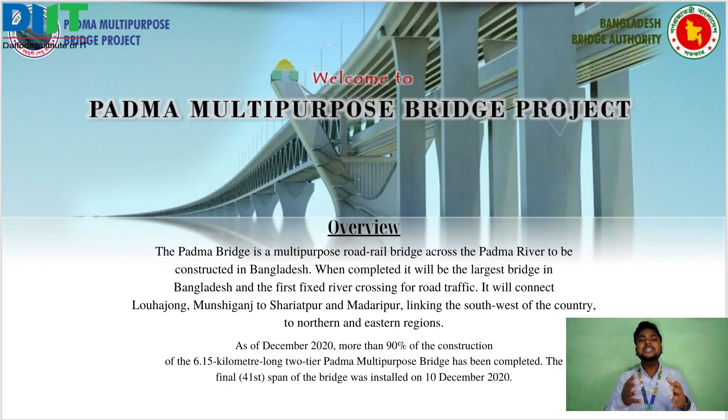Now I will talk about the general information of the Padma multipurpose bridge. The first point is land acquisition, which is almost about 1,471 hectares. The second point is the bridge in brief.

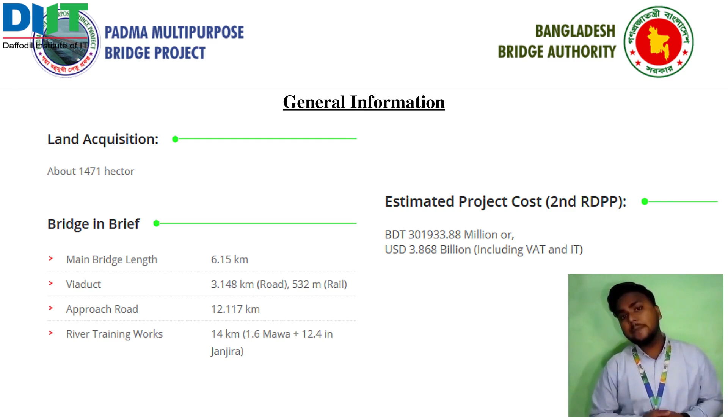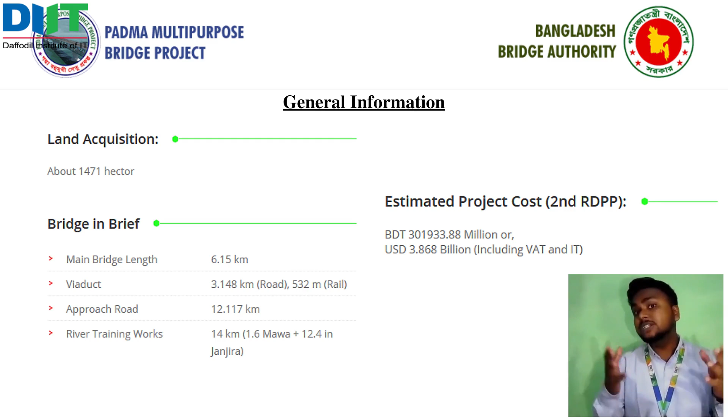First, main bridge length is 6.15 kilometer. Viaduct is 3.148 kilometer for road and 532 meter for rail. Approach road is 12.117 kilometer. River training works total 14 kilometer, which is 1.6 kilometer for Mawa and 12.4 kilometer for the Janjira side. The third point is estimated project cost, which according to the revised development project proposal is 301.93 billion Bangladeshi taka, or 3.868 billion USD, including VAT and income tax.

Let's move to the next slide. This is a visual presentation of Padma Bridge. Padma Bridge is the name of a dream for our Bangladesh. The bridge will be approximately 6.15 kilometer long and 18.10 meter wide. It will be a double deck composite steel trussed structure and will use 41 spans.

The main spans will be 150 meter long. The upper deck will contain a 4-lane highway, while the lower deck will house a rail line, gas transmission pipeline, optic fiber cable, and power transmission line. The speed of the train will be 160 kilometers per hour. The total lifespan of the bridge will be 100 years. When the bridge is active, it will take less than 10 minutes to cross by car.

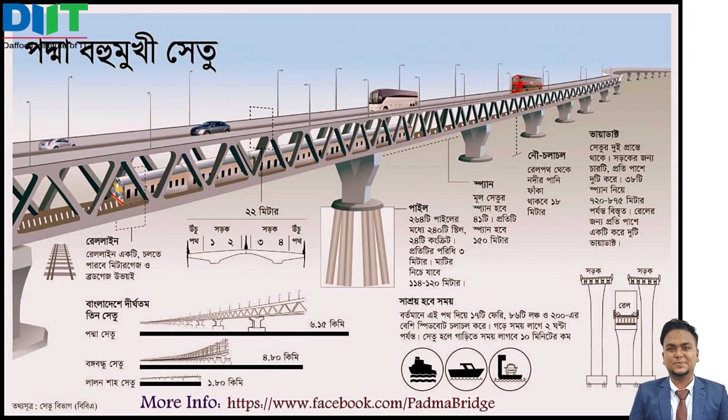Now we will watch a 3D animation video of the Padma Bridge.

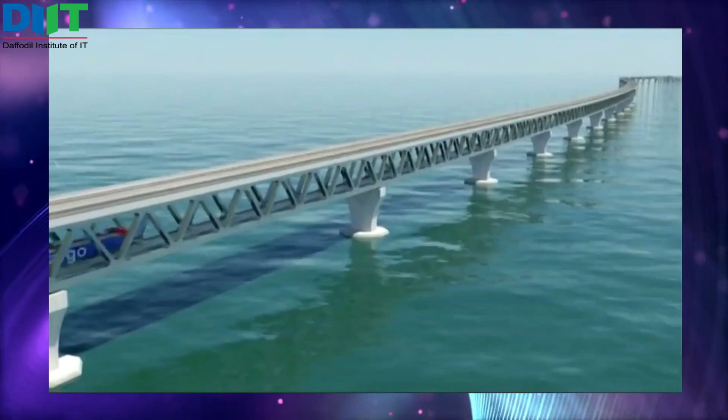Now I will talk about the type of project. The Padma Bridge is a multi-purpose road-rail bridge project across the Padma River, a constructional and communicational type project. It will connect 21 districts in the south. Moreover, direct communication will be established between Mongla Port and Benapole land port through the capital and the port city of Chattogram. According to Railways Minister Nurul Islam Sujon, the railway line from Dhaka to Bhanga in Faridpur will be launched with the opening of the Padma Bridge.

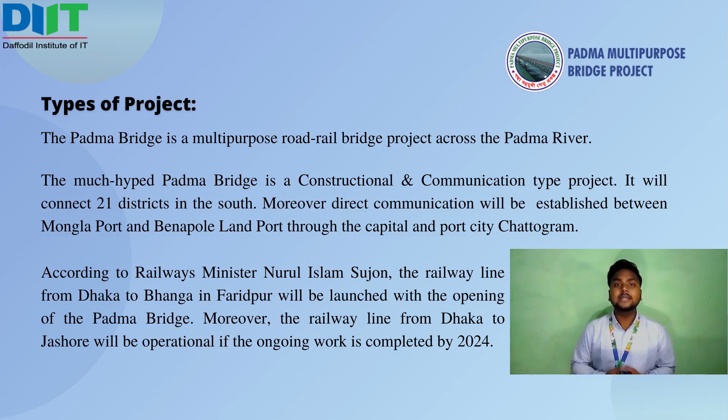Moreover, the railway line from Dhaka to Jashore will be operational if the ongoing work is completed by 2024. The timeline of this project: construction started 7th December 2014, with the project expected to end in 2022. A country's economy mainly develops through its communication system. When the Padma Bridge is completed, the communication system between the southwest district and the whole country will be developed as well.

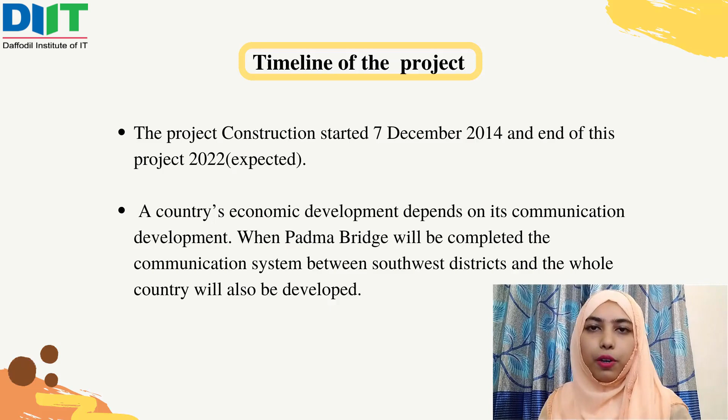Which companies are involved in this project? China proposed building the bridge on a build-own-transfer, or BOT, basis by investing $2 billion, or 70% of the project cost. Four companies, China Major Bridge Engineering Company, Daelim-L&T JV and Samsung C&T Corporation, purchased the tender papers, but only the China company proposed their financial proposal, on 24 April 2014.

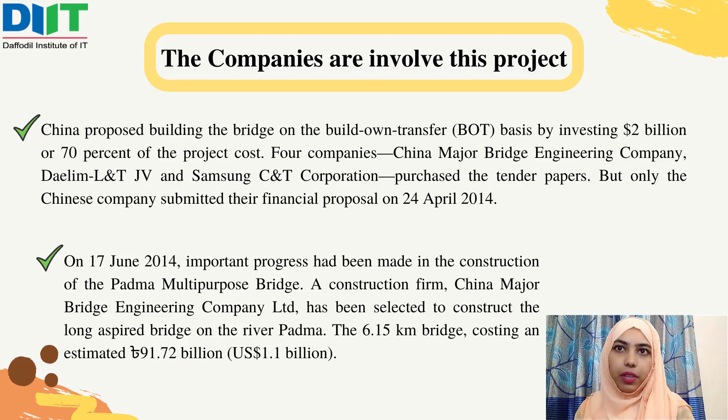On 17 June 2014, important progress had been made in the construction of the Padma multi-purpose bridge. A construction firm, China Major Bridge Engineering Company Limited, was selected to construct the long aspired bridge on the river Padma. The 6.15-kilometer bridge cost an estimated Taka 91.72 billion, or USD 1.1 billion.

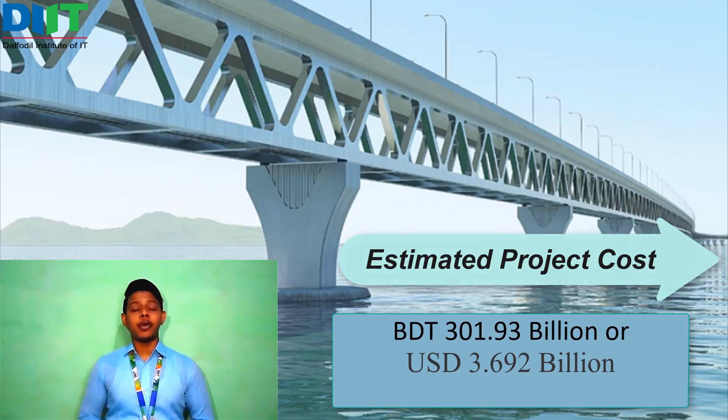The estimated project cost as per final decision and design is 287.93 billion Bangladeshi Taka. After that, the government of Bangladesh purchased some land and added additional cost of 14 billion Bangladeshi Taka. That's why the entire cost of the Padma multi-purpose bridge is 301.93 billion Bangladeshi Taka, that means 30,193.38 crore Bangladeshi Taka, which is 3.692 billion US dollars, including VAT and income tax.

Let's talk about the Padma multi-purpose bridge project cost summary, the last revised development project proposal. There are 8 types of work components. The first component is main bridge cost, where the DPP cost is 121.33 billion Bangladeshi Taka, which is 40% of total cost.

Then approach road, 12 kilometers with toll plaza and service area 2, where DPP cost is 19.08 billion Bangladeshi Taka, which is 6% of total cost. Then river training works, 13.8 kilometers, where DPP cost is 94 billion Bangladeshi Taka, which is 31% of total cost.

Then resettlement, where DPP cost is 15.15 billion Bangladeshi Taka, which is 5% of total cost. Then land acquisition, where DPP cost is 26.99 billion Bangladeshi Taka, which is 9% of total cost. Then environment, where DPP cost is 1.29 billion Bangladeshi Taka, which is 1% of total cost. Then consultancy, where DPP cost is 6.78 billion Bangladeshi Taka, which is 2% of total cost.

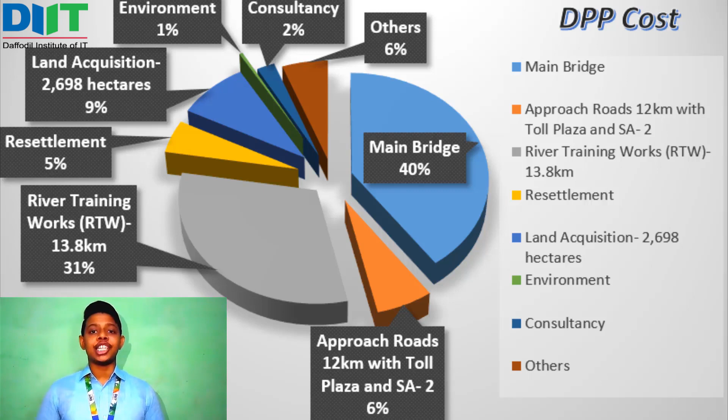Then other cost, where salary, VAT, transport cost, income tax, etc., the DPP cost is 17.31 billion Bangladeshi Taka, which is 6% of total cost.

Let's talk about the increased cost of this project. The government of Bangladesh faced lots of problems to make this project successful. The Padma Multipurpose Bridge was first approved by the Executive Committee of the National Economic Council (ECNEC) in 2007 with an estimated cost of BDT 101.61 billion. After that, the length of the bridge was increased due to a change in design, for which the estimated cost hiked to BDT 205.07 billion, which was approved by ECNEC in 2011.

The second revision of the Multipurpose Bridge project was approved by the Executive Committee of the National Economic Council (ECNEC) on 5th January 2016 with an estimated cost of 287.93 billion Bangladeshi Taka, to be implemented by December 2018. After the second approval in December 2018, the estimated cost of the much-hyped Padma Multipurpose Bridge project is likely to see a rise for the third time, by around 14 billion Bangladeshi Taka. The new rise will take the overall cost up to 301.93 billion Bangladeshi Taka, as acquisition of additional land is required for the project.

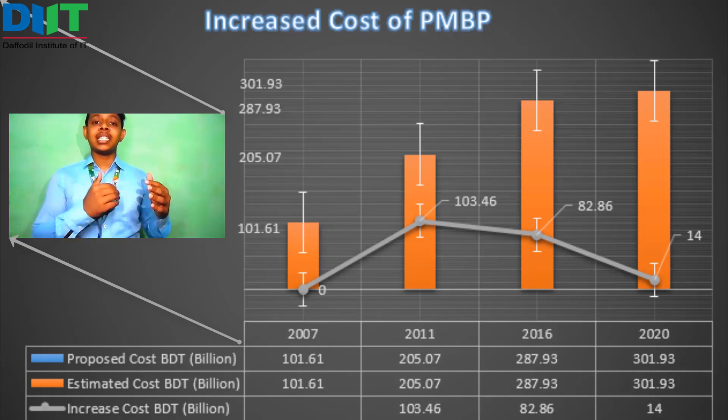The increased cost from 2007 to 2011 is 103.46 billion Bangladeshi Taka. On the other hand, the 2011 estimated and proposed cost is 205.07 billion Bangladeshi Taka, and the 2016 proposed and estimated cost is 287.93 billion Bangladeshi Taka, where the increased cost is 82.86 billion Bangladeshi Taka.

And last, the 2016 to 2020 increased cost: the 2016 estimated and proposed cost is 287.93 billion Bangladeshi Taka, and in 2020, the estimated and proposed cost is 301.93 billion Bangladeshi Taka. The increased cost is 14 billion Bangladeshi Taka, which is for purchasing land.

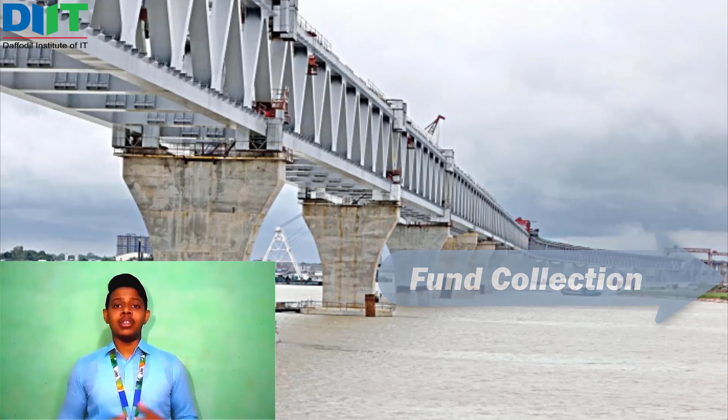Let's talk about the fund collection agency, where and how the fund has been collected. Financing plan and loan signing have been finalized with development partners like World Bank, Asian Development Bank, Japan International Cooperation Agency, and Islamic Development Bank.

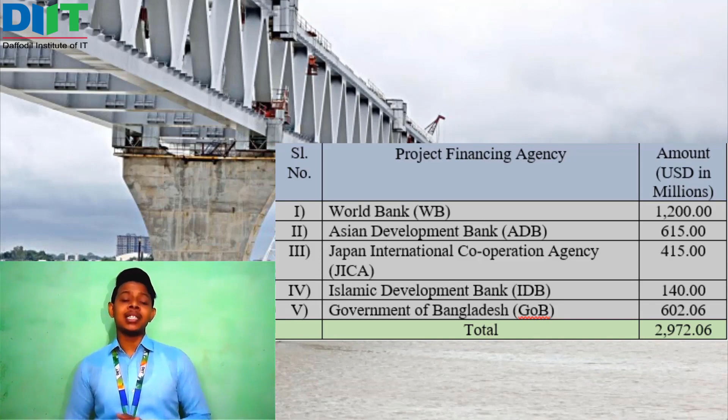The project financing agencies who gave us loans to make this project successful: first of all, World Bank gave us 1,200 million US dollars. Then Asian Development Bank gave us 615 million US dollars. Then Japan International Cooperation Agency gave us 415 million US dollars, and Islamic Development Bank gave us 140 million US dollars. The implementation of the Padma Multipurpose Bridge project faced a setback in the earlier stage, on 29 June 2012.

The World Bank had cancelled its 1.2 billion IDA credit for the project, claiming that it had credible evidence of a corruption conspiracy among high level Bangladeshi government officials, SNC Lavalin executives, and private individuals.

After that, the government took it as a challenge and decided not to take loans from funding agencies. On 9 July 2012, they decided to complete the project with its own funds. The Honorable Prime Minister said the government had earmarked Taka 1500 crore for infrastructure development and 3000 crore Taka in the public and private partnership fund. Besides, a certain amount had been allocated for the Padma Bridge in the budget.

In this presentation, my first topic is the present situation of this project. Work on the Padma Multipurpose Bridge is broadly divided into 5 parts: the main bridge, river training, link road, infrastructure, and construction.

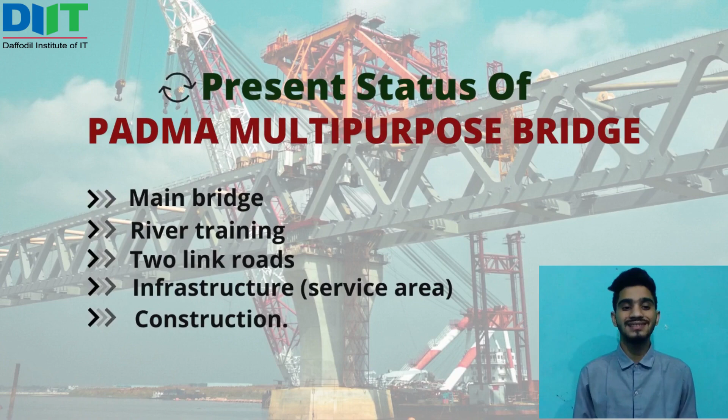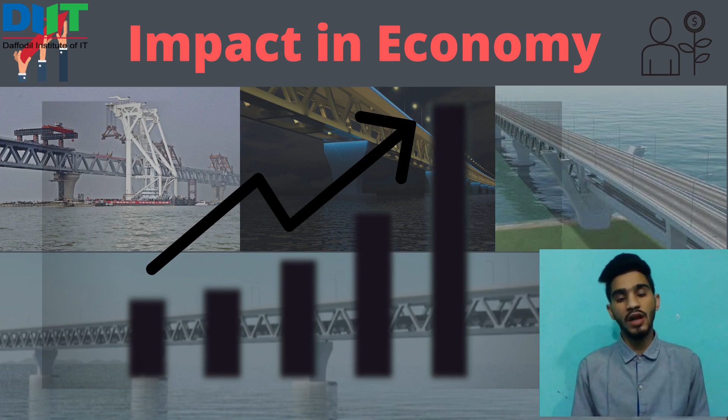My second topic is how it will impact the economy. The high GDP growth of the country has increased its per capita income much more than many of its peers, and reduced the rate of poverty. The Padma Bridge is estimated to increase GDP by 1.20%, and at the same time poverty will reduce by 0.84%. It will change the socioeconomic status of more than 60 million people across 21 districts. It will create opportunities for employment and income, and goods and services will move smoothly from one place to another.

Now I will discuss the Padma Bridge challenges. Padma Bridge has main challenges like economic problems, construction challenges, time maintaining, and modern equipment. In my opinion, construction challenges are harder than the others.

If I discuss the construction challenges: number 1, insufficient pile capacity. According to design, each pile should have a capacity of 8200 ton, but where a clay layer is encountered, pile capacity is reduced to about 6250 ton.

Number 2, increased scouring at the bank. The length of the pile varies from pile to pile. The average length of pile is 115 to 120 meters. But due to increased scouring at the bank Janjira point, pile length had to be increased to 123.75 meters under piles 37 to 41.

Number 3, limitation in increasing pile length. Bearing capacity of the pile can be increased by increasing skin friction, which requires an increase in pile length. Skin grouting is another challenge of this project. Recently, this process has been tested on various piles.

If I discuss the overcoming of challenges of Padma Bridge: number 1, inclined piles. To deal with the massive river current, the designers decided to provide inclined piles, designed with a 1:6 ratio. Because of this, it can resist more lateral force, which also helps resist earthquakes.

Number 2, artificial river. To place the span on pillar number 41 and 42, an artificial river was created by dredging to provide sufficient depth for the flowing current to move.